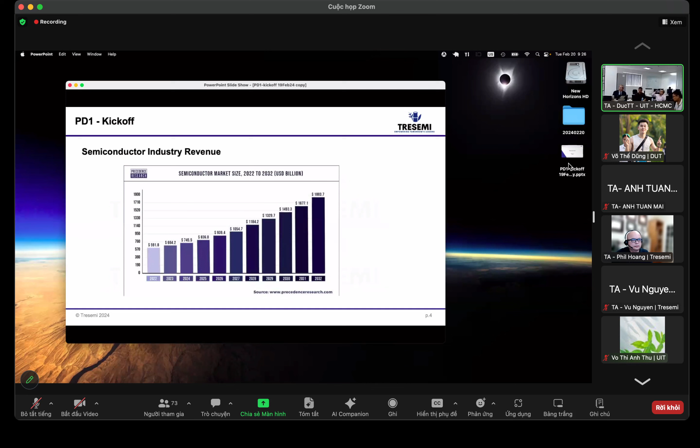The dominant players in the industry right now, from a nation standpoint, are the United States, Taiwan, Korea, and the Netherlands, with individual companies representing on the order of $22 billion at the top end with Intel, but still $4 to $5 billion for other organizations and companies.

Even in its fledgling state, the Vietnam semiconductor industry had almost $4 billion of revenue in 2022, with an expected annual growth rate larger than the worldwide growth rate, 12.6% from 2023 to 2028, projected to exceed $8 billion annually by 2028.

Over 40 multinational corporations are already present, and already working in Vietnam are 6,000 or more engineers in the semiconductor industry. The need and plan is to grow 50,000 more engineers by the year 2030.

Vietnam is the next semiconductor destination. What you've heard from the people who've already spoken to you, and what you hear both in Vietnam and internationally, is that Vietnam is anticipated to step in and take over a large portion of the need for the worldwide semiconductor industry.

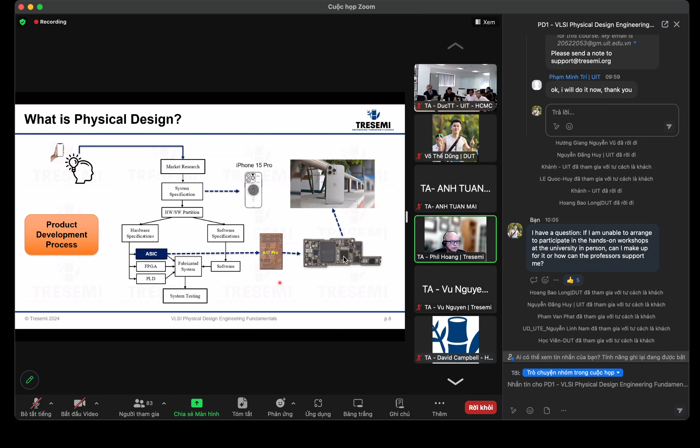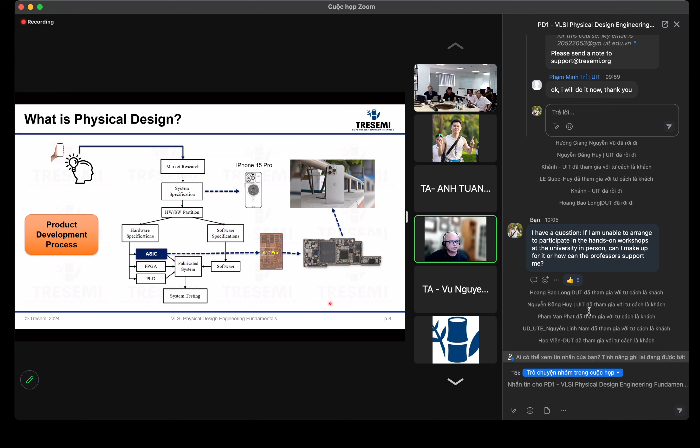So physical design is somewhere in here. We call it application specific IC. The reason for the term 'application specific' is that regular design is general purpose that can be used in any kind of product, while this is targeted at a specific product like a cell phone, so it's called application specific. I'm not going to go over the rest of the styles because of time constraints, but you can find out what other implementation or design styles or methodologies are used other than ASIC. So I'll jump right into this ASIC.

What does that involve? The ASIC development flow - basically ASIC is cell based, and we'll go over why it's called cell based, but this is how a chip is built. This is a simplified flow. You go through the specification process where marketers do market research, and out of that market research there's a document called the marketing requirement document, MRD. Our people, like Vu Nguyen, who works for defining products for NXP, are in this space.

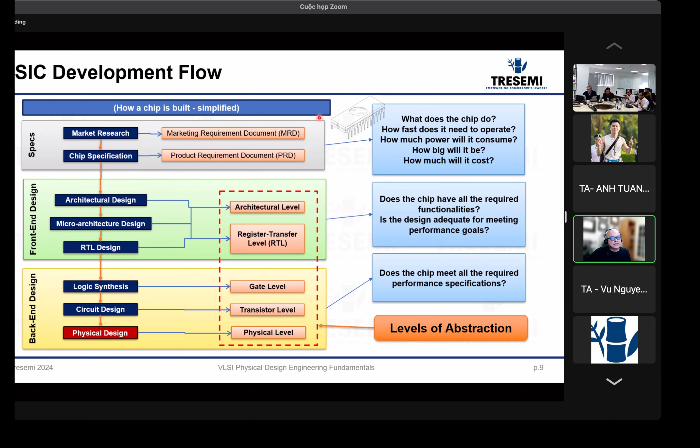So we create the MRD and then also what we call a product specification, product requirement document, that defines what the chip does, how fast it needs to operate, how much power it will consume, how big it will be, how much it will cost. At the end of the day, can you sell a lot of chips and make money? So it defines what the market needs and what people will buy.

And after that comes what we call front-end design and back-end design. There are varieties of definitions, but this is what we go with. The front-end design involves architectural design, microarchitectural design, and RTL design. This is nothing new - it's very typical, but it's just a way to explain the process for those not exposed to it yet.

So for architectural design and microarchitecture design, you will have some kind of architectural level, what we call abstraction. This is a key concept you need to understand - why you have different levels of abstraction, what that means and why we need it. We'll go over why, but basically the result of these steps represents the same chip.

The A17 Pro is represented differently at different levels - at the architecture level, at the RTL level, we'll learn what RTL is, at the gate level, transistor level, and at the physical level. So the front end involves architectural and microarchitectural design, then RTL design, and the back end involves turning an RTL design into the gate, transistor, and physical representation before being sent to the manufacturer, through a process called logic synthesis and circuit design.

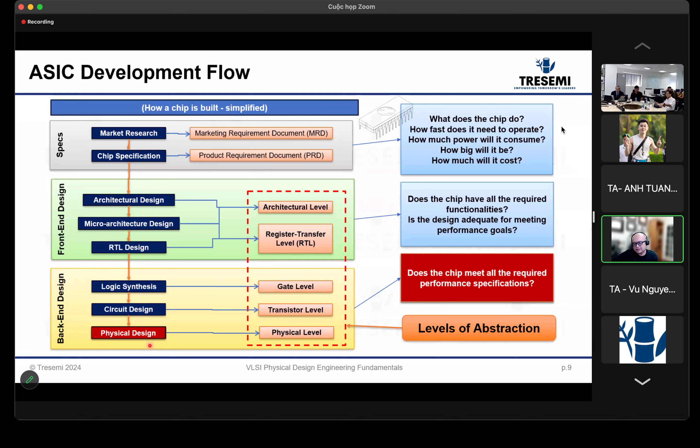The primary goals of physical design are this: it encompasses optimizing integrated circuits for superior performance, minimizing power consumption, and efficient chip area utilization. Basically, you've heard about PPA. PPA optimization means finding the right balance between these three factors to achieve an optimal design for a specific application or use case - for example, for the A17 Pro chip.

In a cellular phone, performance means how many cores, what speed, etc. This is basically the overall processing capability. Can you optimize it? Can you enhance the performance? Can you beat the competition in terms of functionality and processing capabilities? And can you meet timing constraints? The cell phone needs a certain gigahertz to realize real-life applications. Can you meet that constraint? So you define the performance - your chip, and therefore your system, is more powerful.

Another P is power. So the second goal is to minimize power consumption. The purpose is to extend battery life and reduce energy cost, because obviously, if you consume less battery, your product is worth more. And for products that are really fast and powerful, they can get very hot. So by minimizing power consumption, it helps you effectively manage the thermal, and in some cases reduces your cost of cooling the system, because your chip isn't as hot as a competitor's.

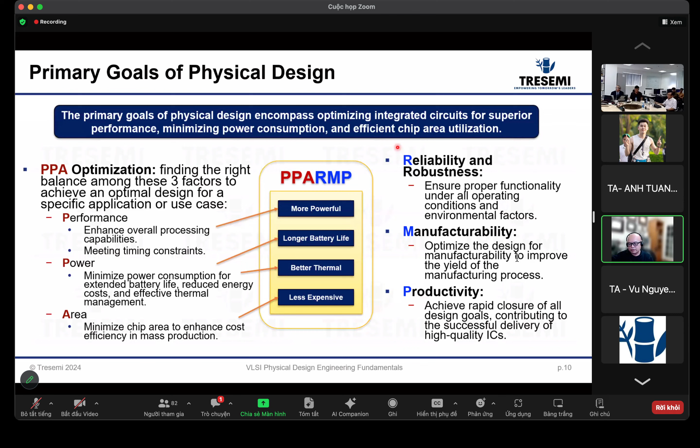Productivity is important. Productivity relates to methodology, tools, and flows. These are the primary goals of your physical design, and hopefully you'll learn the fundamental things we do in order to achieve these.

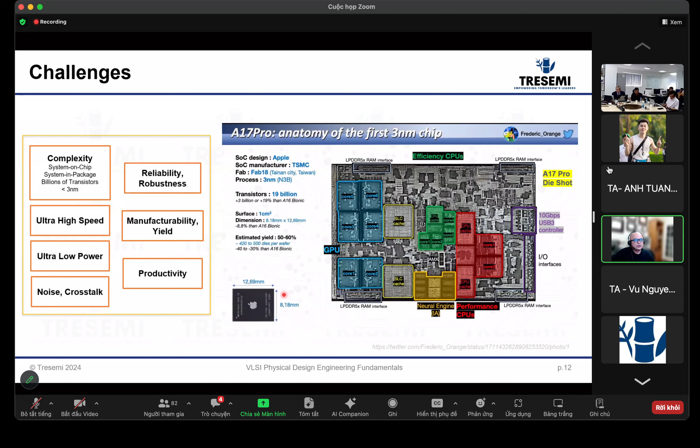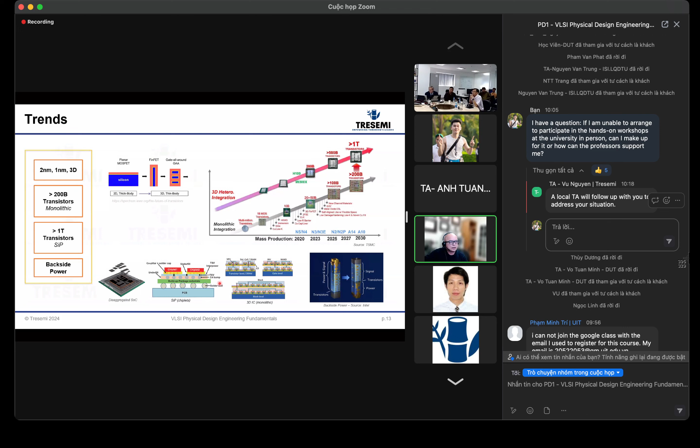Right here is a chiplet that you have 1, 2 in parallel. This is just called 2.5Ds, where instead of the pins going from the path, you connect them via RDL, redistribution layers, and all these.

What they call the bumps, and they use TSV, through silicon vias, etc. Mainly bring some of the passive design to the package, and the 2.5D, 3Ds. You have logic chips on top of MCU, versus 2.5Ds, where we have logic chip in parallel, but the memories are stacking. Basically, it's just going vertical.

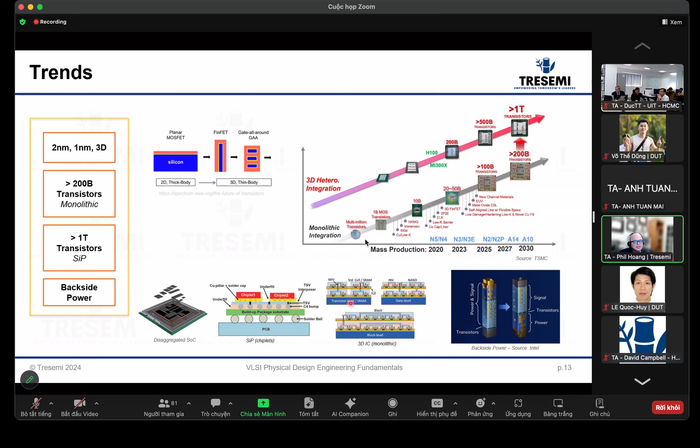But in the future, on a single die, instead of just one single substrate, you'll have layers, where you have standard cells and RAMs on one layer, and then logic gates on the other, lower level. You have block level versus gate level. So you have wafer on top of wafers and connecting through these vias, and this is happening.

And then also Intel's backside power is something that Intel has been trying, and it might bring benefit in future systems, and may be a norm in the future. So these are some of the examples of the future trends related to physical design.

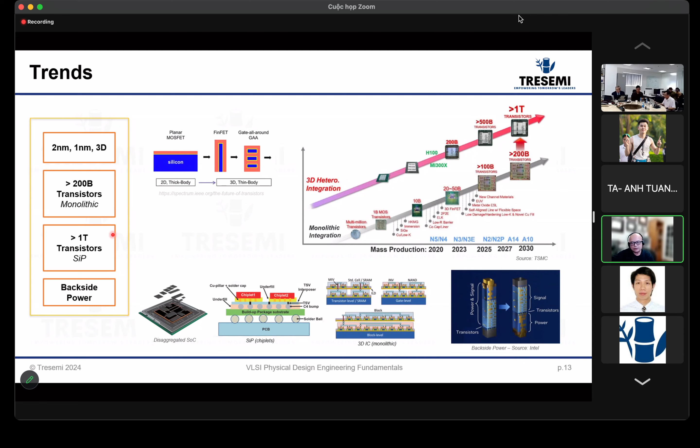So to address a lot of those challenges, and to address the complexity of VLSI in general, what are the principles? These principles have been identified for a long time. It's called hierarchy, regularity, modularity, and locality. And why do we have these things? Billions of transistors need to have some strategy instead of randomly putting them together and hoping it works.

So hierarchy means divide and conquer. You have a complex system, so you divide it into different functions, and then you divide further and further. They call it modules. When you go into the design directory and they call it modules, you need to know really why a module. But the modules you keep breaking down until at the level where you can comprehend.

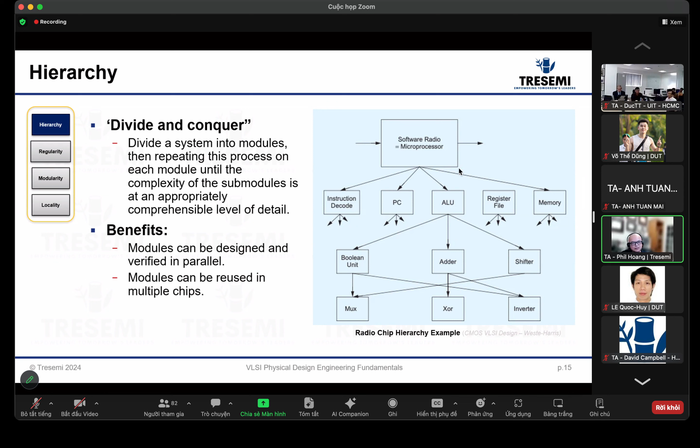In the past, designing that first microprocessor, you do one transistor at a time. But this is another concept: regularity. You divide the design into a set of similar building blocks. It can exist at multiple levels, like a standard cell level. Regularity means you have a fixed height of the cells, but variable lengths for the logic gate. For example, a small inverter will be sort of like a length of 1, and then you have a flip-flop with a length of 5, but the height is the same. So that's the regularity on that height.

And then for all these memory compilers, you call it parameterized. They build from a regular cell, repeat themselves, and build bigger and bigger. You also design all these sub-modules like multipliers or even a core, and you can reuse them. You can hear how this new Intel processor has 20 cores, or this NVIDIA AI chip has 1,000 cores, for example. Those cores are designed only once but repeated 1,000 times. So the benefit is to reduce the number of subcomponents to design, optimize, and verify, and components can be reused.

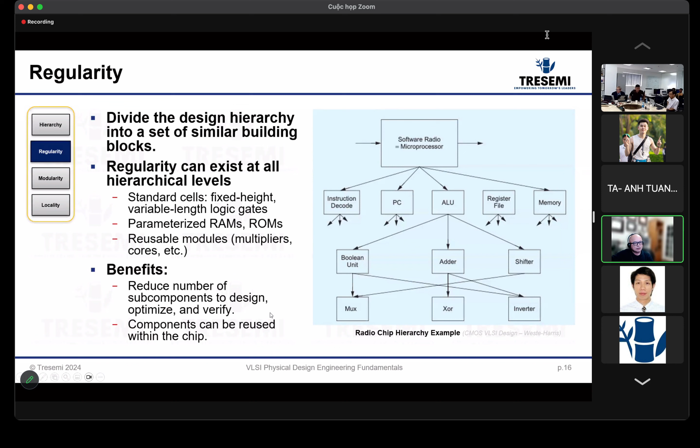So that's the second concept. The third concept is modularity. You break the complex systems into smaller, well-defined, and independent modules. What does it mean? The function has to be well-defined.

The interfaces have to be well-defined. Why would you want that? Because when you put blocks together, you know what to do in terms of verification and in terms of designing one block. You know the interface well, so you can design without knowing so much about the other block. So it's ease of design and independence of design, right?

And ease of maintenance, scalability, and reusability. Scalability meaning you can make it bigger or smaller, but you don't have to redesign the basic slice of it. And reusability, what does it mean? You design once and then you can reuse it many times.

This is an example: embedded SRAM. It has a standard interface—read-write address, setup time, data setup time, data output time, and everything. Everything is very standard and modular, right?

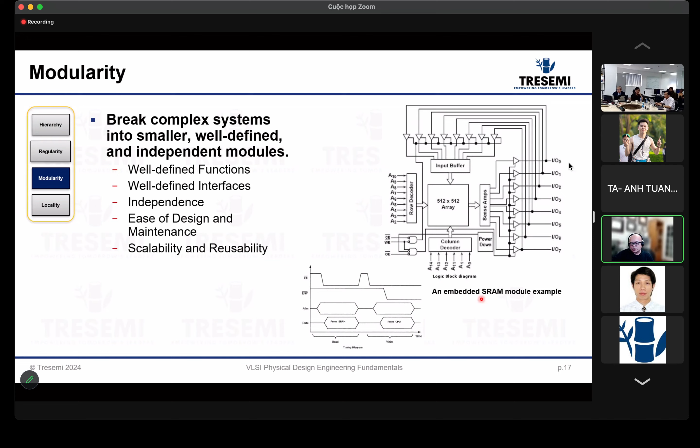So that's modularity. Last but not least is locality. What does it mean by locality? It's organized and structured design in a way that emphasizes the proximity, or closeness, of related components and operations. So there are different aspects here: spatial meaning—are they close enough? Temporal meaning—are they closely related in terms of timing? Functionality—are similar or related functions grouped together?

Communication—do they talk to each other? If they talk to each other, you put them closer. Why? Because you can minimize the connections, making it faster and consuming less power, for example. And power locality means power-hungry components or regions should be located and managed for minimum power dissipation.

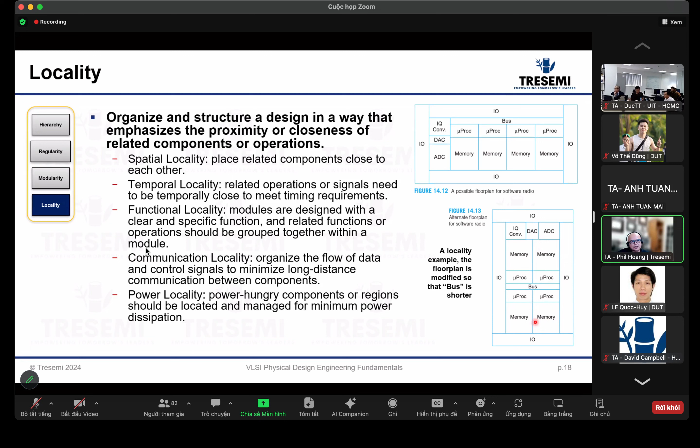This is an example—what is this? This is a software radio. In here you have memories, microprocessors, buses, and IOs. This bus connects these four things talking to each other. If you put this microprocessor over here and that one over there, the bus can be long, going from one side to the other. So locality means putting these four processors close together to minimize this bus. Minimizing this bus means it can be faster and consume less power. So it's just an example.

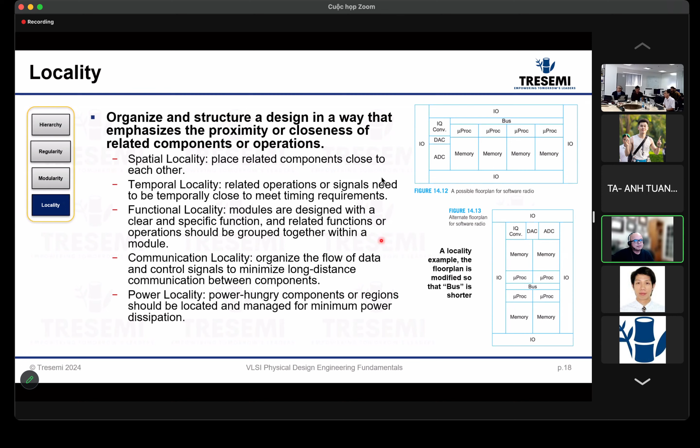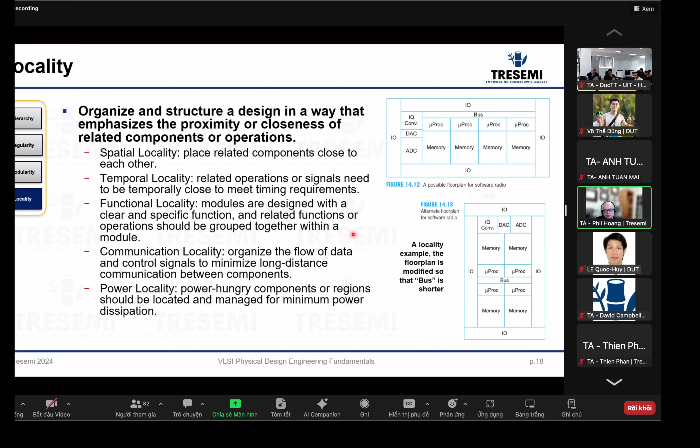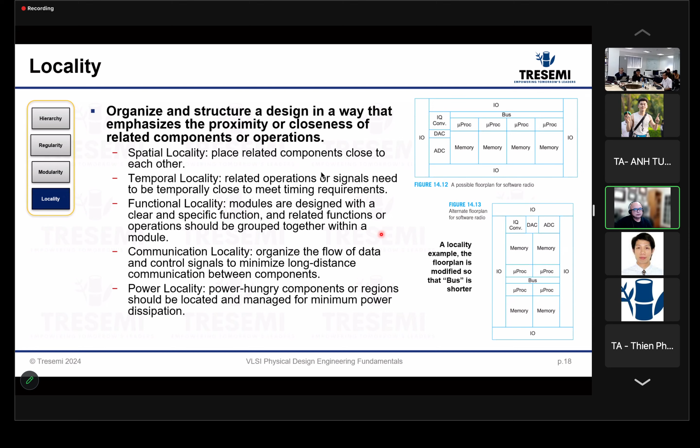These are important concepts to understand when you do physical design. When you push a button, knowing the underlying concept makes it a lot more interesting to you. Because of it, you understand it more, it's more fun, you become more creative, and you can make a difference—you can be a leader instead of a follower. Let me see how we're doing on time.

In each domain you have different views. It's kind of not intuitive to look at, but it helps you visualize or understand. When you have a chip and a complex design, you have different views—where are they? You have layout, you have transistors, you have algorithms, you have leaf cells. You need to know why there's such complexity, and this helps explain it. But because of time, I won't go into details—I encourage you to look at it yourselves.

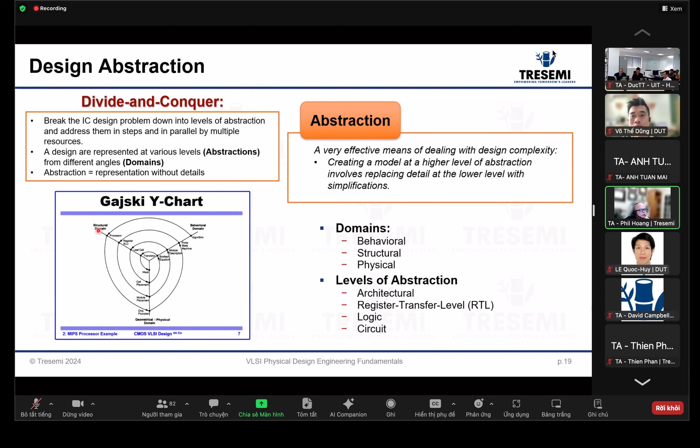In the behavioral domain you see algorithms. In the structural domain it means a processor—is that a processor? Yeah. Sorry if it's hard to see, but in the structure domain, or the physical/geometrical domain, it's a processor, and here's a chip floor plan.

This is where we are—we're in the physical domain, but at the chip level, meaning when we do floor planning, we add the processor or the algorithm from the behavior domain. So you go through the module, then the cell, then the mask, meaning transistor. This is a transistor—in the physical domain it's a mask or layout, in the structure domain it's a transistor, but in the behavior domain it's just zeros and ones. So this helps you visualize your level of abstraction across various domains.

To me, when I started, I knew nothing about this. I just went in and designed at the transistor level. My first project was an embedded dynamic RAM—I jumped right into capacitors and transistors. I never knew all these things, but we tend to be bottom-up.

But it's fun to understand top down. So this is a key concept of abstraction. It allows you to do an effective means of dealing with design complexity, right?

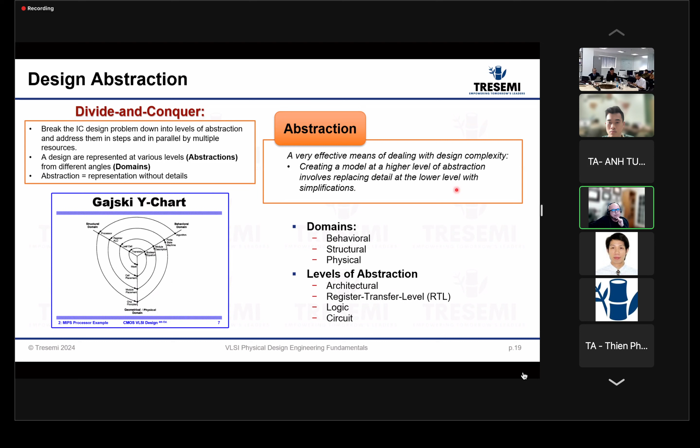Creating a model at a higher level of abstraction involves replacing detail at the lower level with simplification. What does it mean? It means that at a higher level, you hide the details, so you don't need to know the details at that level. So you abstract it, and that allows you to run faster and allows you to only look at things that are important at that level of design.

So this is a detail, and everybody knows about this, right? At the processor level, you see block diagram is processor, RAM, ROMs, IOs, behavior, you represent them as equations. And then at register level, you represent them with registers and some logic, and do register to register. And then you go to logic level, where you represent them with gates, Boolean gates, right? NAND, NOR, inverter, flip-flops. Transistor, go down to the transistor, and your layout, which is a physical representation of the transistors.

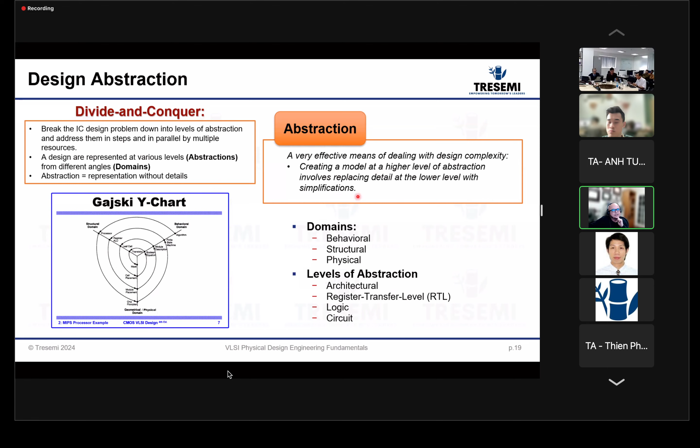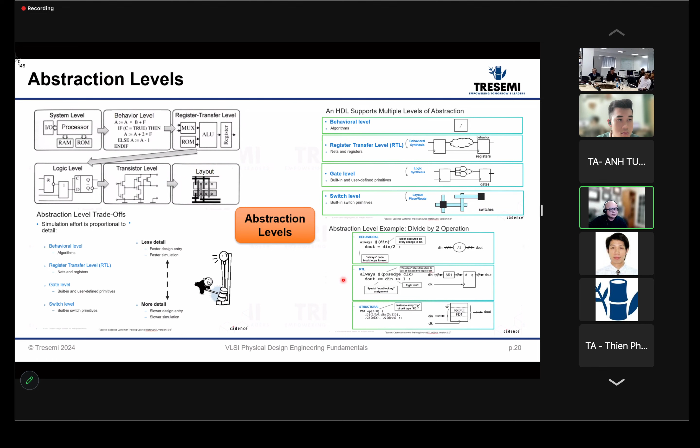These things you guys can read. But just visually, these are the different levels of abstraction of the same thing, of the whole chip, but you have different levels of abstraction. So I'll let you read these. But this is another way of looking at it.

Because of the voltage control gate, because of the doping of these two regions, and you already should know all these things. It's just a switch, meaning depending on the voltage on the gate, either on or off. On or off can be used to represent like a truth table. A truth table really implements a logic gate.

You have real world signal, audio coming in, RF or microphone. You convert those into digital signals, and then from digital signal you process it, and then you convert back to analog, to the real world, and you go out. So basically, the real world is analog, and then you sample it, sigma delta, whatever, and then you have a digital representation of the data coming in.

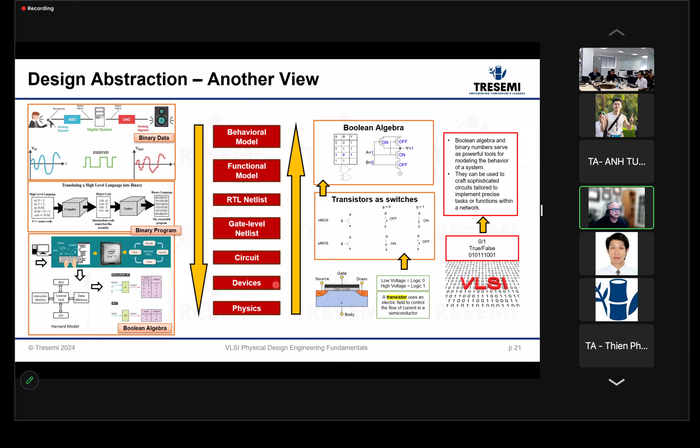So with all these things, design levels of abstraction, this is just some backdrop so that you understand what you're doing instead of just pushing buttons, right? Like a lot of people do.

So now on the back end, there's some terminology, right? When you're at the back end, you see both of these produce the gate level representation of the design, but logic synthesis still deals with speed and power.

At the gate level, the actual parasitic R's and C's at the logical level are not known yet. But the reason you want to do this with estimated parasitics is because it has a higher level of optimization, where you choose the data paths and different building blocks based on the need for speed. So you might pick a carry look-ahead adder instead of a ripple carry adder. If you don't need the speed, you pick the simple building block to save area and power. But if you look at everything, the speed of operation becomes too much, so you divide and conquer: at logic synthesis, you estimate the parasitics and give a good gate level netlist, and in physical design you do more and understand more.

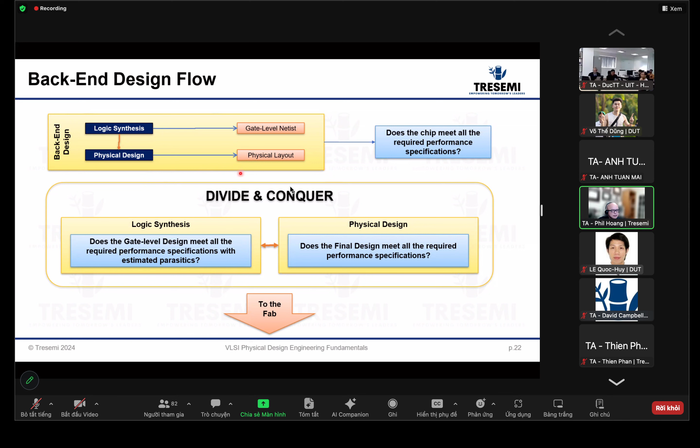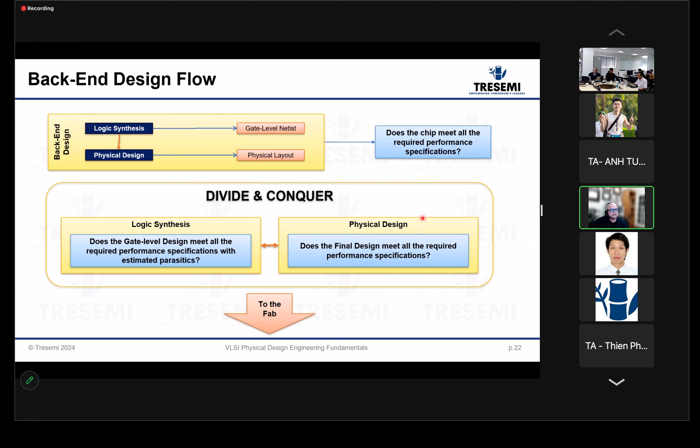Basically, to answer the question of PPA and all that. But physical design is the last step. After we're done, we send the mask to fabrication. So what we do is really important - a lot of people, because of their approach, think it's pretty much just like a polygon pusher, but that's not what physical design is about. Physical design is really a very high level skill.

Some terminology here, because people define different things for physical design. Some say physical design involves logic synthesis. Some say physical design is just place and route. But this is the definition we're comfortable with: logic synthesis, place and route, parasitic extraction, and sign-off. We call this back-end design or digital implementation, because at this point you're not really on the logical side designing - you're implementing a logic. But we use the word physical design here because you're really designing your transistors. So you still do a design. Circuit design is kind of part of it for very high speed functionalities where the standard approach might not be good enough - then you do custom design. Circuit design is also used to build the IPs, the foundational IPs, and custom blocks used at the higher level of your flow.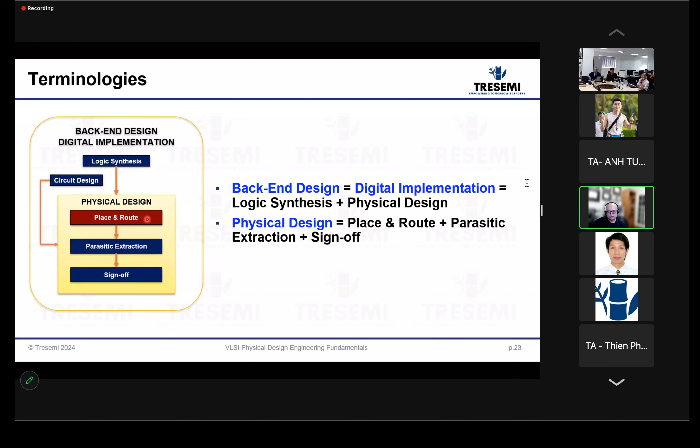So here you can define basic backend design - sometimes called digital implementation - which involves synthesis and place and route. But physical design, synthesis and physical design - we reserve physical design for just place and route, extraction, and sign-off. So that's physical design. But the core of physical design is what we call place and route, as you're familiar with. Okay, so those are the terminology.